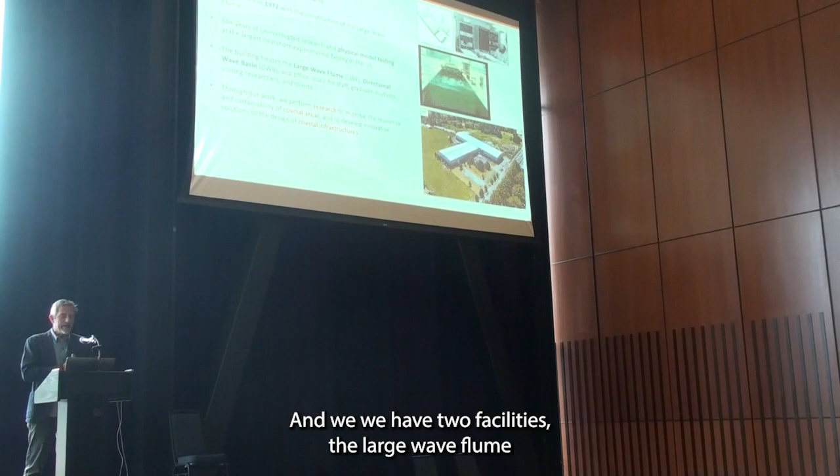It was built in 1972, so we had our 50th anniversary a year ago. We have two facilities, the large wave flume and the directional wave basin. They have different approaches, different sizes, different intentions, but fundamentally what we do there is testing of waves, and we are introducing new capabilities, including wind and the possibility of currents.

A little bit of story related to what you know: in 2004, the facility was extended by the National Science Foundation to be able to run tsunamis in the basin, and later on in 2008 also in the flume. We were part of NEES until 2014. In 2016, we got the award of becoming part of the NHERI program, and in 2021 we had the extension until 2025.

Sideways, we are also collaborating with the Pacific Marine Energy Center, in the field of marine energy. And the Department of Energy also - we are part of them through the program TEAMER.

And I put there something that we are very proud of. We were last year the awardees of the Hamaguchi award from PARI, the Port and Airport Research Institute in Japan, that is awarded to facilities that have been providing significant effort on coastal and tsunami research.

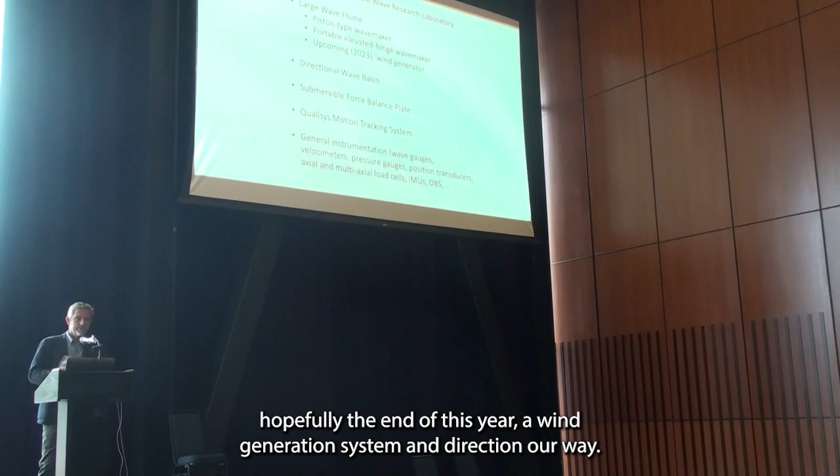So I'm going to show you very briefly some of the characteristics of what we have, and then later on I will talk a little bit about how you can access those. On the large wave flume, we have two ways of generating waves. We are also upcoming, hopefully by the end of this year, a wind generation system, the directional wave basin, and other capabilities related to your work, including a new submersible force balance plate and ways of measuring underwater and above water motion.

The type of experiments that you do there, the advantage is that they are relatively large scale. It's almost full scale in some cases, and from that perspective it's the largest facility in the US. The waves that we produce there are the largest ones, and we are top 10 in the world. The dimensions are over there, but the important thing is that we have been using this facility since it was built in 1972.

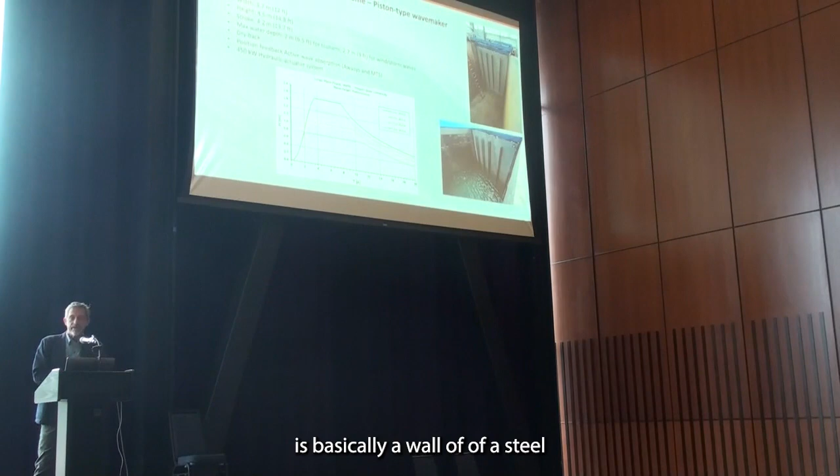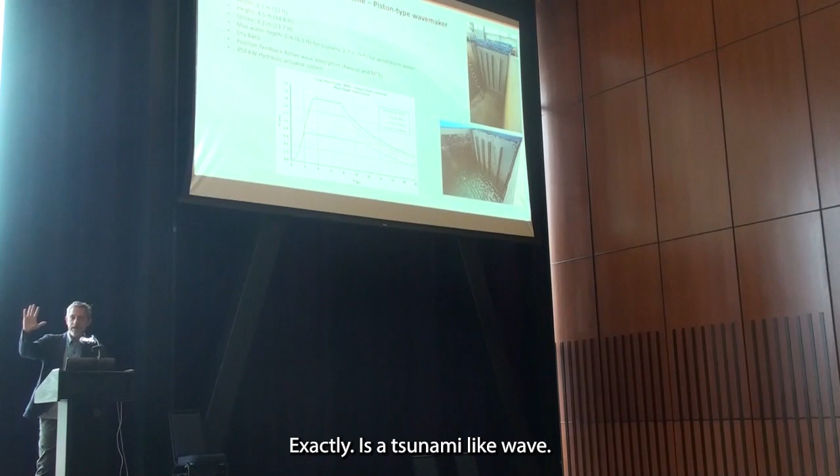A little bit on the characteristics of the wave machine. We have two. This one is what we call the piston system - basically a wall of steel that moves back and forth, and that generates the waves. It's the one that has the capability of running tsunamis or very, very long waves. It's not a tsunami exactly, it's a tsunami-like wave, and we've been using it for a number of projects that I will highlight later on.

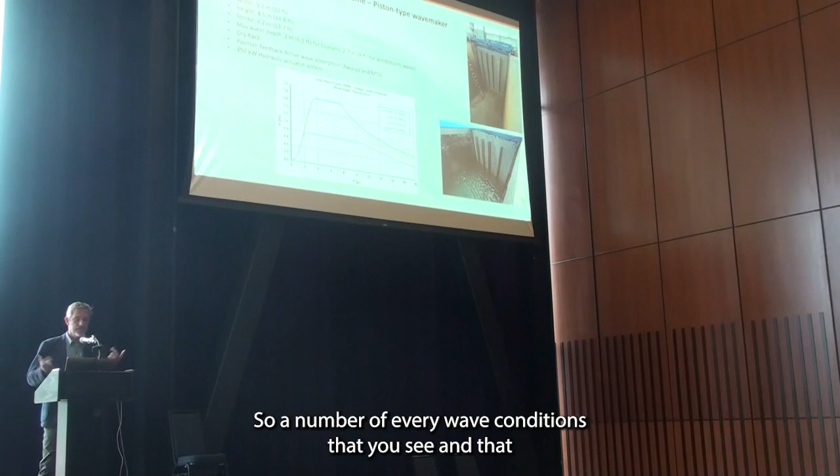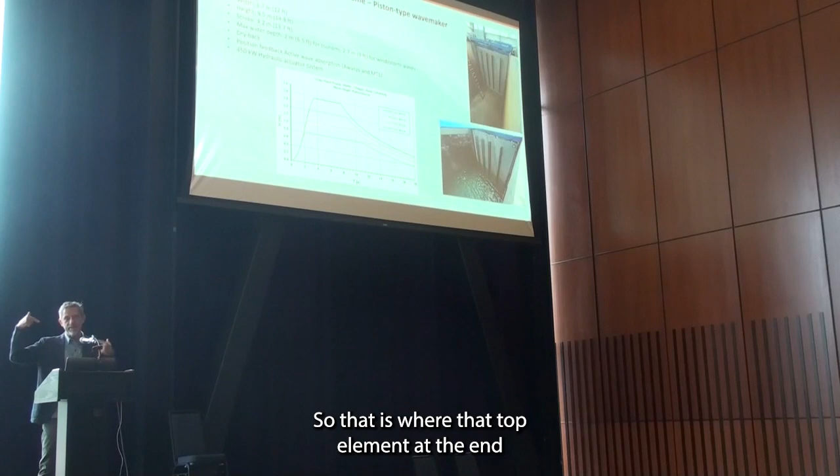What you see there is the performance curve, we call it. Every wave condition that you see in that curve are the waves that we can generate. So for a given water depth, everything that is under the curve is something that we can generate. That top element at the end is what makes us the largest facility in the U.S.

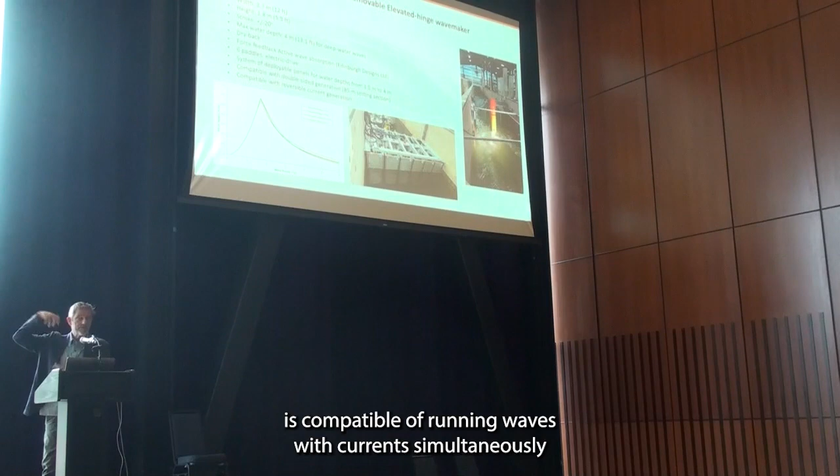We recently also acquired another wave generation system, because the maximum water depth that we can achieve with the other wave machine was limited to 9 feet. But we wanted to also address some experiments for the marine energy industry, and that's why we purchased a removable wave maker, because we didn't want to stop using the one that we already have. The advantage of this one is that it can produce waves with current simultaneously, or sediment, for example, studies of sediment transport.

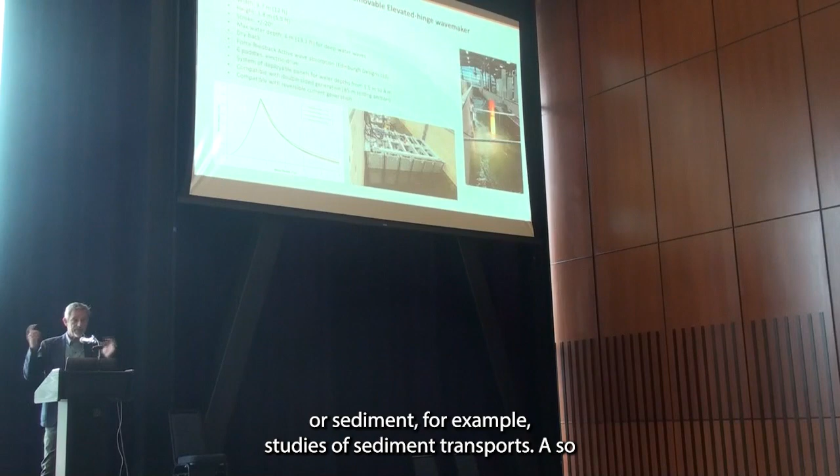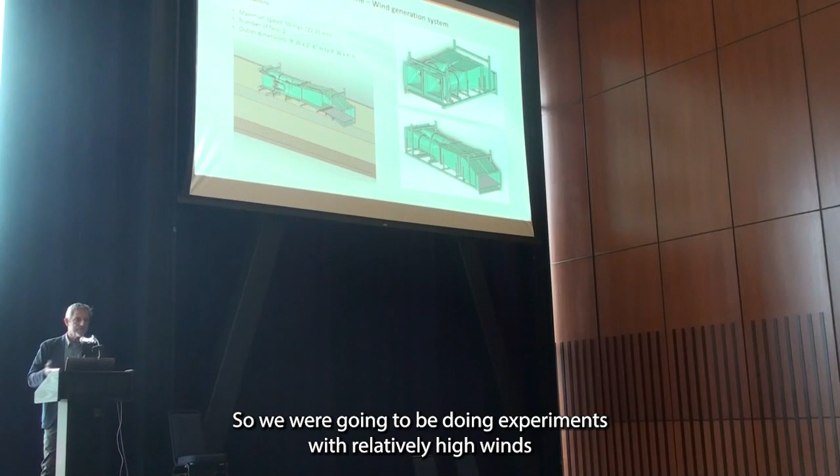So from that perspective it's an additional asset, and helps us to bring the wavemaker in different directions. This is a render of the wind generation system that is being built as we speak, and we are expecting to commission that in November. So we are going to be doing experiments with relatively high winds and waves as part of a study on the design of the NICHE facility.

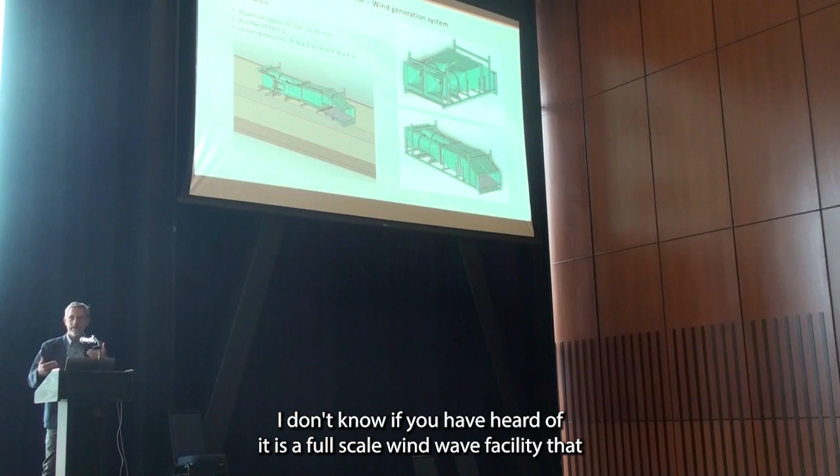I don't know if you have heard of it. It's a full-scale wind wave facility that the National Science Foundation is supporting.

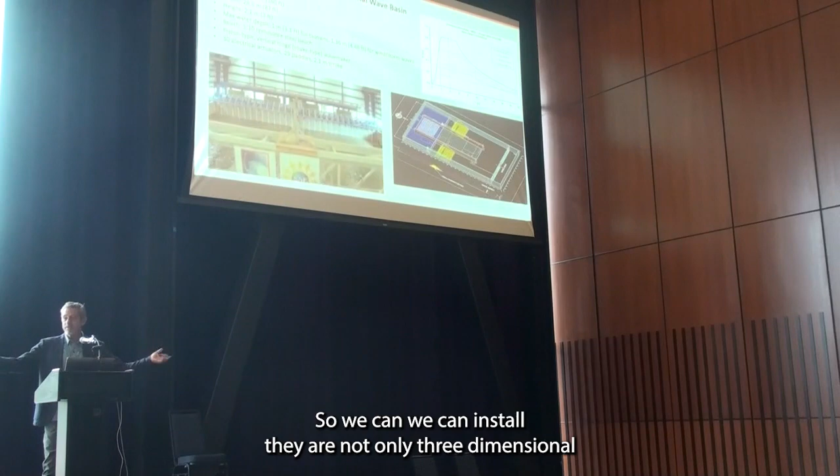This is the basin. Imagine an Olympic swimming pool. So what we are doing is releasing the three-dimensionalities of the modeling, so we can install there not only three-dimensional models, but also we can run three-dimensional waves. Because the size of the facility has been increased in another direction, the size of the waves and the water depths that we can produce are about 50% of what we do in the flume.

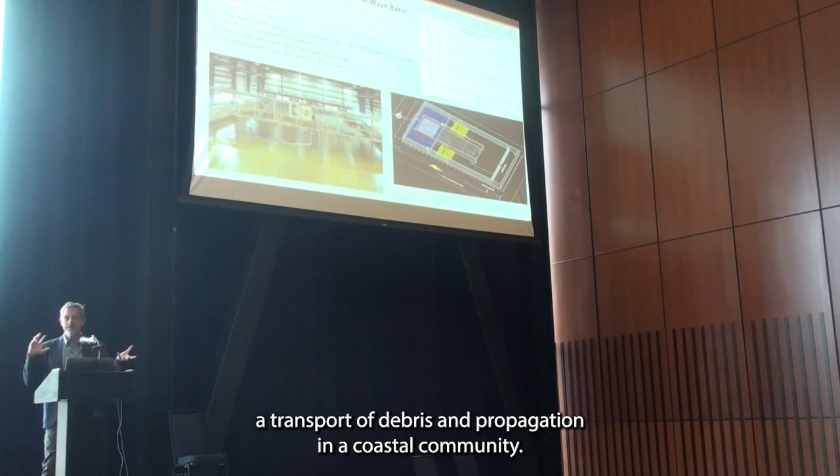This is just, for example, the render there you see on the right-hand side is an image of an experiment that we did through National Science Foundation on waves, tsunamis, and currents, studying tsunami transport of debris and propagation in a coastal community. The ability of the facility is that you can really think of it as an open box, and then we build things on top of it based on the specific needs of the project.

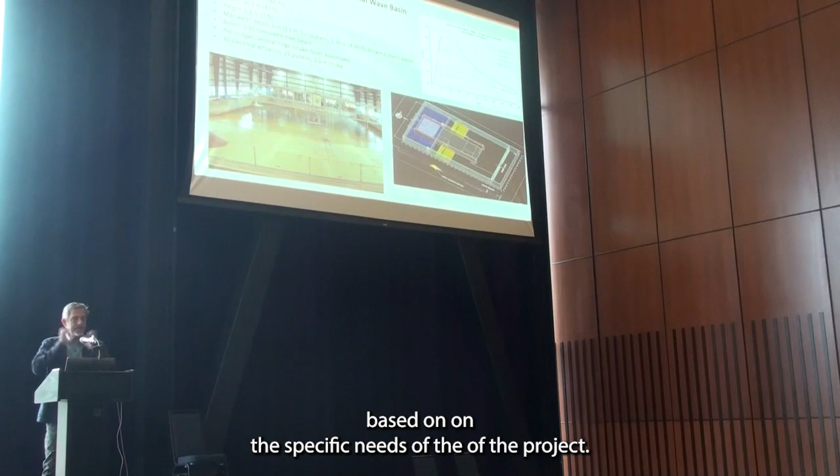More recently, we purchased a force balance plate. It was a continuous question on wave structure interaction. Your structure, you want to measure what are the forces and the moments, and those are subject to the actual conditions. Normally those forces need to be measured on the water, and there is no specific instrument made for that. So we talked with a series of companies, and we found one instrumentation company that was able to build a submersible force balance plate for those experiments. You see the capacities there, and this is one of the examples that was placed recently.

As we speak, we are doing it for a DARPA project, for example, on measuring the forces of the waves on a submerged reef.

What you see there is a study that we did early this year with the University of Hawaii on waterborne debris that was damming on a coastal structure. We were measuring the forces of the impact of those debris pieces underneath that plate that you see there on the different columns. There is the force balance plate, and we have the 6 degrees of freedom and the moments of the forces there. We have another system that is now getting advanced.

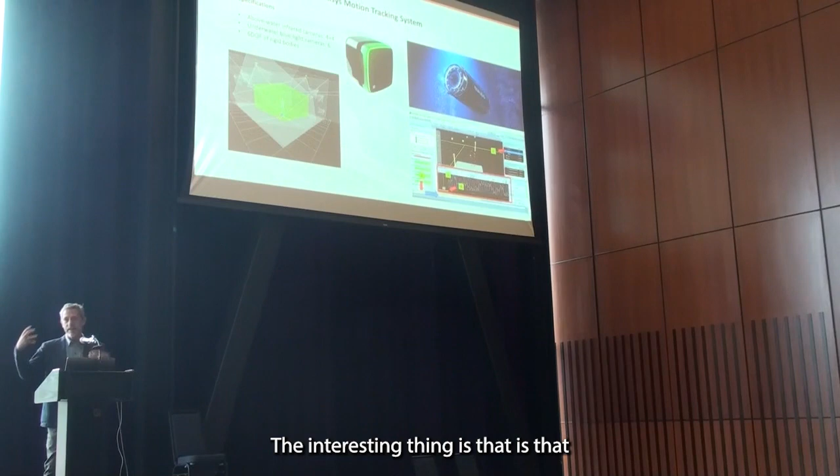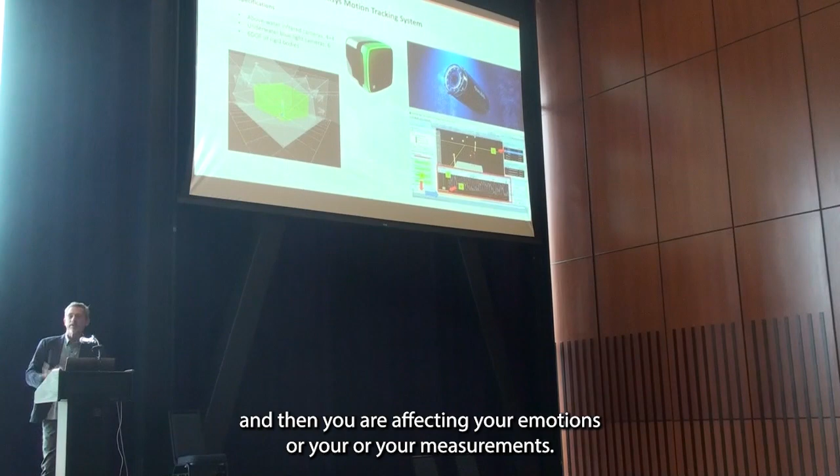It's Qualisys, a motion tracking system that has the ability to measure motions above water and below water. The interesting thing is it's basically measuring things without touching, which is one of the paradoxes of measuring. To measure something, you normally need to touch it, and then you are affecting your motions or your measurements. So this is using infrared light, or blue light if it's underwater, to measure displacement up to submillimetric capacity, depending on how close the cameras are.

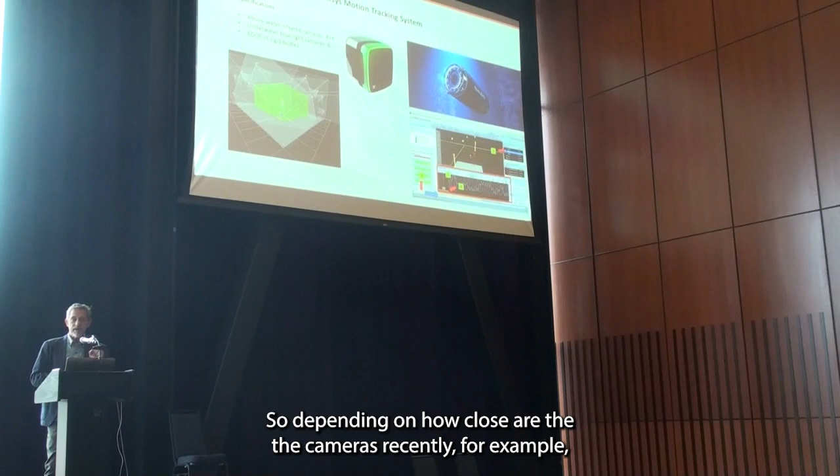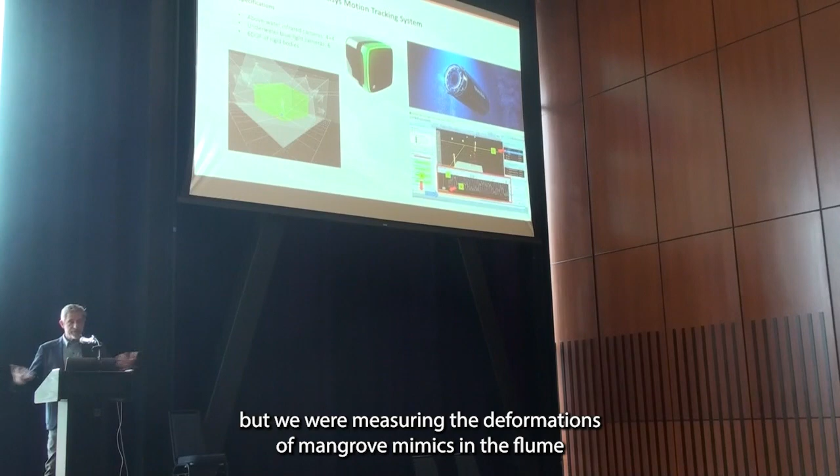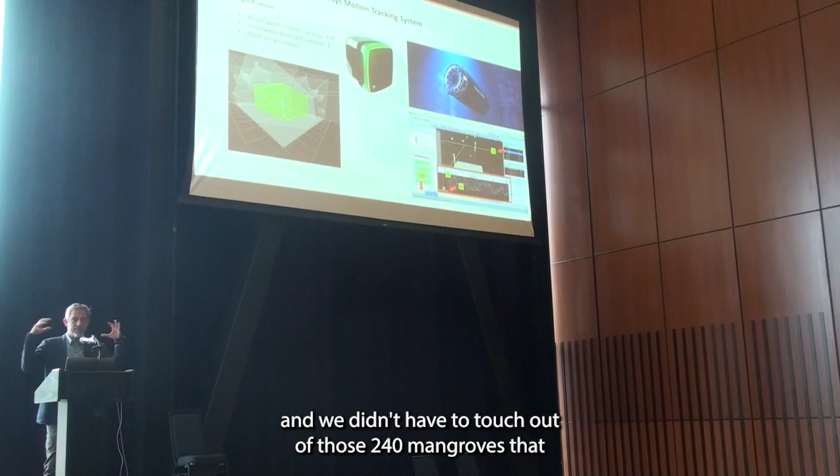Recently, for example, trying to find different applications—normally we use it for floating bodies—but we were measuring the deformations of mangrove mimics in the flume, and the cameras were able to correlate the displacement with the hydrodynamic forces, and we didn't have to touch any of those 240 mangroves that we placed in the flume.

This is going to be a quick list of different experiments that we have done, specifically through National Science Foundation's NHERI program since 2016. But I have to say that since 1972, we have done experiments of all kinds—everything that goes into the water has been tested in the flume, probably including people, surfers. Probably we have done, in the last 50 years, about 200 different experiments of all kinds, but these are related to tsunamis and structures.

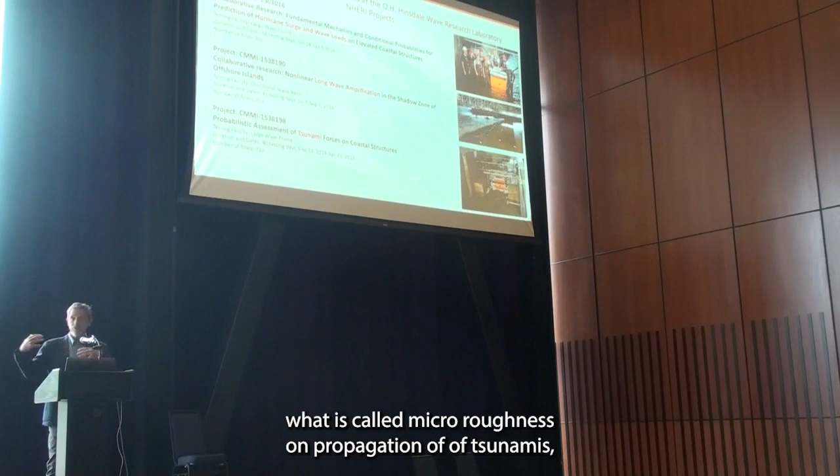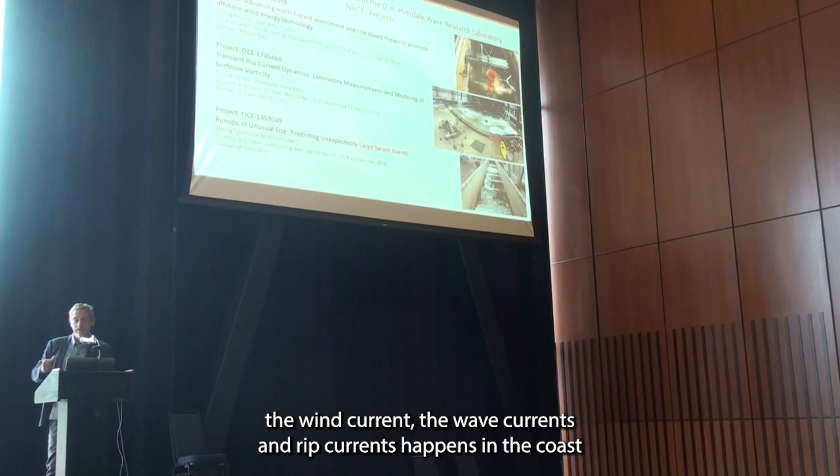Starting with wave interactions with elevated buildings like houses, also the effects of sheltering of islands, conical islands on the coast, the effect of what is called macro roughness on propagation of tsunamis, water tanks—fuel tanks placed in different locations—deployable walls for protecting against flooding, an additional study on conical islands. The experiments with that cylinder you see there is actually the foundation of a fixed wind turbine. Studies of specifically how the currents—the wind current, the wave currents and rip currents—happen on the coast, generation of long waves and sneaker waves.

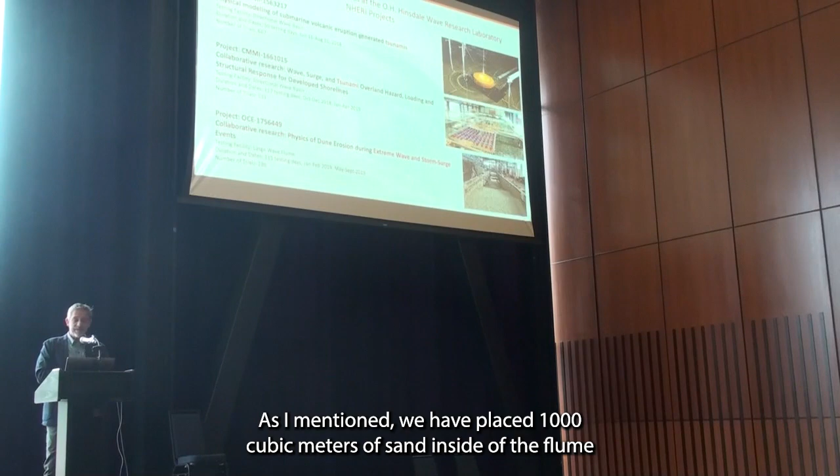I don't know if you have heard of those, but that's an interesting story of things that kill people on the coast every year. Submarine volcanoes, propagation on coast—as I mentioned, we have placed 1,000 cubic meters of sand inside of the flume for measuring the formations and how the vegetation of a dune is protecting or increasing the stability of a coastal profile.

Elevated evacuation structures—we did a series of experiments also for the University of Washington recently. The mangroves, full-scale mangroves that we tested first. Waterborne debris is the one that you see there at the bottom. Other things like nature-based solutions—there's a lot of people working on nature-based solutions and engineering with nature, including, for example, the mangroves, but also those floating pods that you see there. It's a design from an architect in Boston. They are building that for Boston Harbor to protect the coast, creating a natural area. We were studying how those elements were dissipating energy.

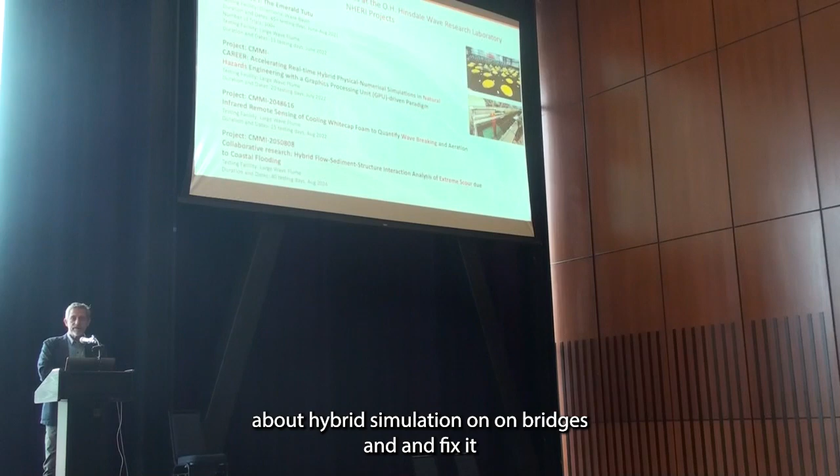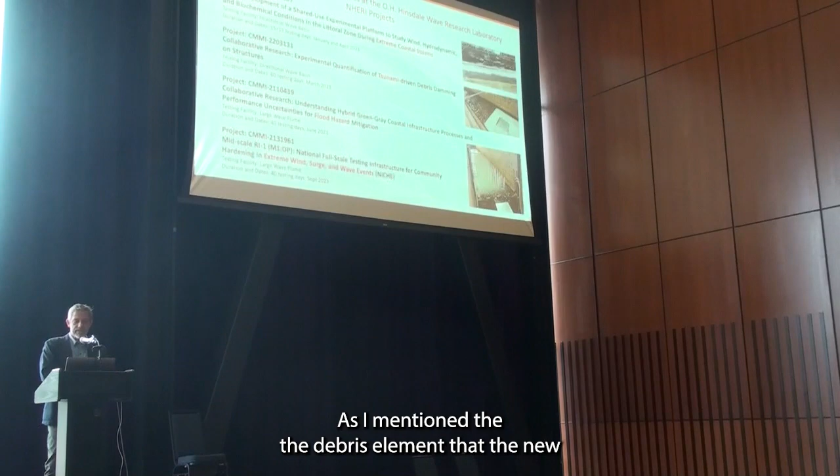So anyway, there is a large amount of experiments that we have done in all kinds of spaces that you might be interested in. Since we are part of NHERI and NSF, if you have a National Science Foundation natural hazard related award, you can perform experiments at our facilities for free, because the operational costs are covered by NSF.

The specimen costs are not included, but the major part, which is the testing, is included. And as others have mentioned, the secret here is to talk to us from the very beginning, so we can have a nice and correct design of the experiments, and understand your needs and your research, so we can give you the best successful research program. And with that, I am open to questions for later. Thank you.